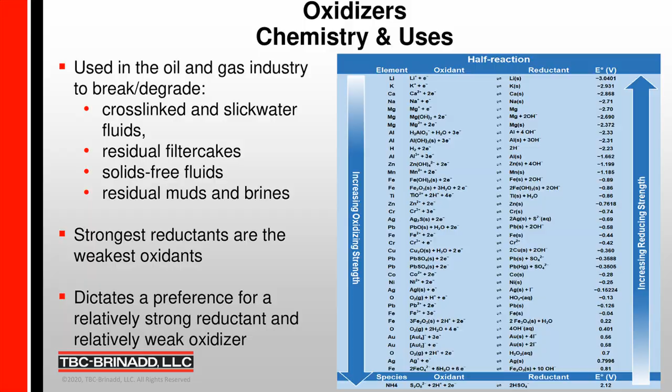So continuing with these species, the commercial forms of magnesium and calcium are attractive with respect to cost, and again, relatively strong reducers, with the potential to accelerate, thus control the reaction, as well as impart relatively safe handling and logistics.

But one important parameter is its relatively slow solubility of this class of peroxides. They remain stable for extended periods of time while in an alkaline environment.

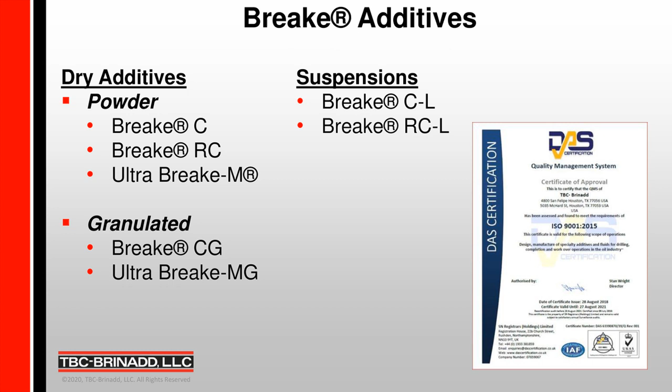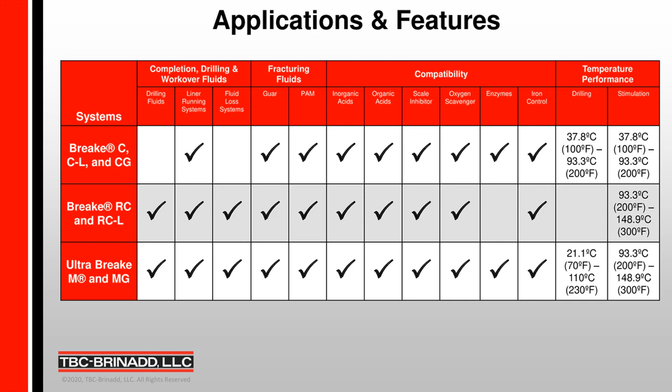So next, Kim will describe in more detail the performance that these products afford and expand upon their utilization for PAM viscosified fluids, as well as fluids that are viscosified with biopolymers, such as drilling and workover fluids, and their subsequent degradation versus time. So Kim?

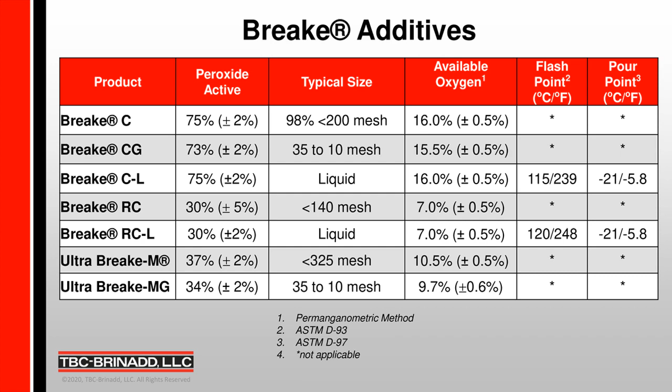Thank you, Mark. As Mark mentioned, today we will be presenting each polymer breaker's features and performance in various drilling and stimulation applications to showcase the diversity of TBC-Brinadd's Breake system additives.

We would like to start with our Breake C and CG products. This peroxide series has the highest peroxide content with active oxygen level as high as 16%.

The CG product is our granular product, developed to reduce concerns with dust hazard in the field. Both Breake products remain stable within storage and have active oxygen loss less than 1% per year. It will disperse readily in water and brines.

pHs, when introduced, will range from approximately 8 to nearly 13, dependent upon concentration. Typical temperature application ranges for the Breake C and CG is from 100 to 200 degrees F, and typical concentration ranges from 0.25 to 2 pounds per 1,000 gallons.

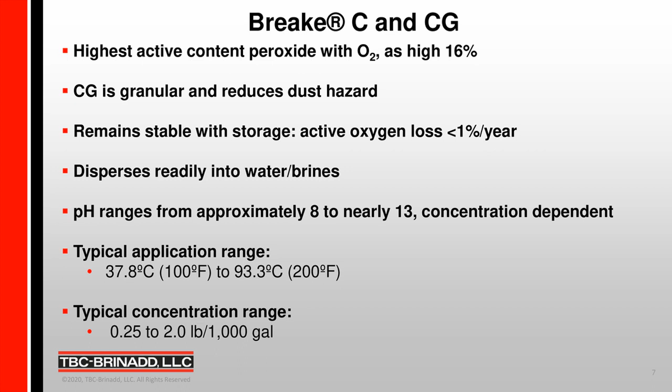Next, we will look at the performance of Breake C in Slickwater fluid testing. This testing was presented in our AADE publication that Mark mentioned.

This assessment utilized a Grace M5600 rheometer to capture viscosity under pressure and temperature, whereby an arbitrary timeline was utilized to simulate a pumping fracturing operation.

The laboratory method involved the preparation and mixing of a slickwater fluid, such as utilized in fracturing operations, at a dosage as applied in operations where a relatively elevated viscosity is required, for example, like the toe of the completion. Elevated viscosity was utilized in order to determine the degradation of the residual slickwater fluids, thus the necessity to utilize a higher polyacrylamide concentration.

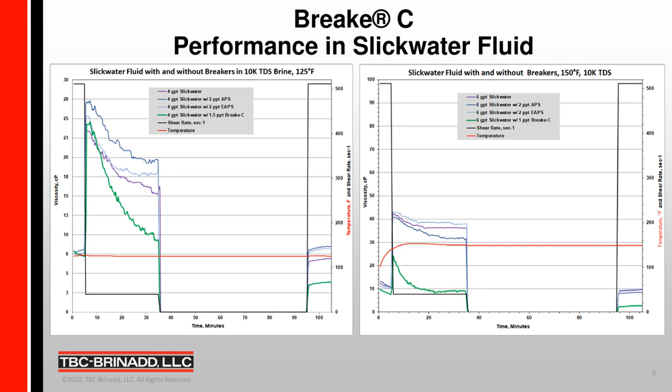Next, we will look at Breake C's performance in a cross-linked fluid.

The guar setup is a 25 pound per 1,000 gallon guar at a pH of 11.8, at 200 degrees Fahrenheit, and the Breake C concentration was 2 pounds per 1,000 gallons. Viscosity reduction occurs over time and is measured until viscosity is at or below our target point of 10 centipoise.

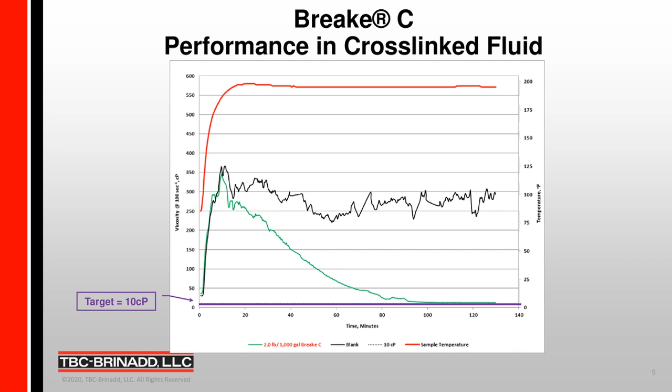Next, we will introduce you to our liquid suspension Breake C-L. Breake C-L is our calcium peroxide suspension and an environmentally friendly synthetic fluid.

The same typical temperature application applies here, from 200 down to 100 degrees Fahrenheit. Typical concentration ranges depend on the application. In drilling, it is 0.5 to 2 gallons per barrel. For stimulation, it's 1 to 5 gallons per 1,000 gallons.

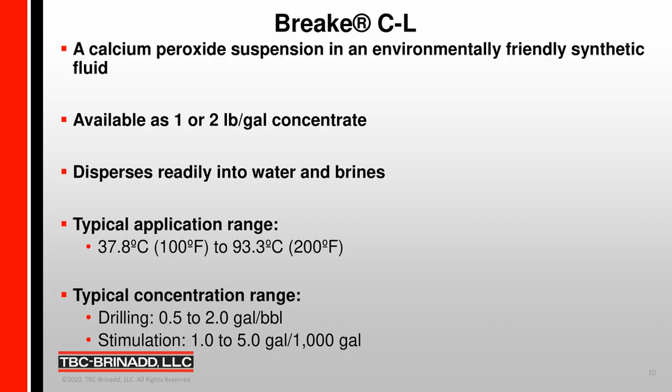Breake CL's performance in cross-linked fluid uses a 25 pound guar again at 200 degrees Fahrenheit. The Breake CL concentration is 2 gallons per 1,000 gallons. Like Breake C, Breake CL performance exhibits the same trend, with viscosity reduction over time measured until viscosity is at or below our target point of 10 centipoise.

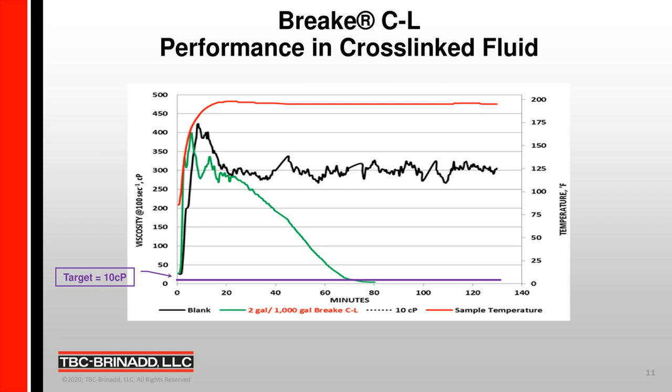Next, we will look at Breake CL's performance in a coiled tubing system. This information can also be found in our AADE conference paper that Mark mentioned earlier.

We had the opportunity, if a customer came to us, with a polymer-based solids-free system used for drilling laterals via coiled tubing, to be assessed with respect to the potential to remediate reported damage. Operations suspected excessive viscous leak off during drilling of the horizontal intervals as the cause of damage, as recent production did not achieve programmed rates.

Specifically, the concern was invasion of a solids-free coiled tubing system into the producing formation, either as whole fluid, filtrate, and/or filter cake, where the filter cake likely formed close to the toe. TBC-Brinadd was asked to evaluate incorporating a breaker into the coiled tubing system used during drilling that would remain inert and subsequently degrade the viscosity of any residual whole fluid, thus improving initial cleanup of the well and alleviating the perceived damage.

The required period to delay viscosity reduction for this solids-free system was established using previous horizontals, including a safety factor, and was determined to be 40 hours.

This graph shows rheology measurements versus time for both high-end 600 RPM readings and low-end readings at 6, 3, and 0.3 RPM, respectively, for two controls versus selected coiled tubing systems.

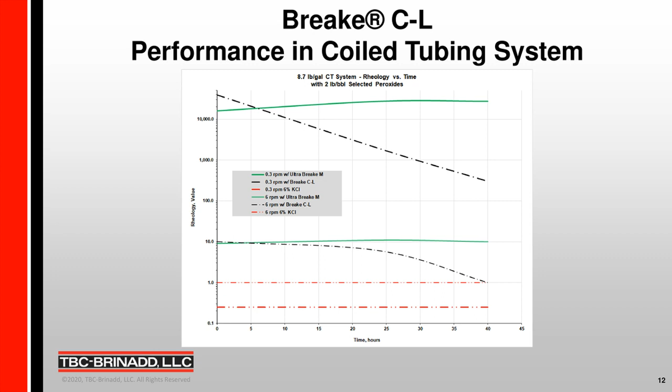Introducing our Breake RC, which is our reduced calcium peroxide. It is an alternative to Ultra Breake M, which generates approximately 5 to 7% active oxygen. Its reduced assay allows it to be classified as a non-oxidizer. It is also stable with storage and has an active oxygen loss of less than 1% per year.

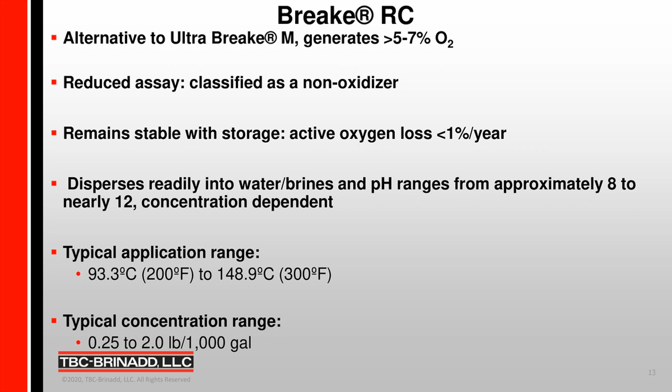It will also disperse readily into water and brines, and the pH ranges approximately 8 to nearly 12. Typical application ranges from 200 to 300 degrees F, and typical concentration ranges from 0.25 to 2 pounds per 1,000 gallons. Next, we will see Breake RC's performance in a cross-linked fluid.

The same guar setup of 25 pounds per 1,000 gallons was utilized. Temperature application for this was 250 degrees F. The Breake RC concentration was 3.5 pounds per 1,000 gallons. Breake RC's performance provides viscosity reduction over time, measured until viscosity is at or below our target point of 10 centipoise. An effective break was reached within 75 minutes.

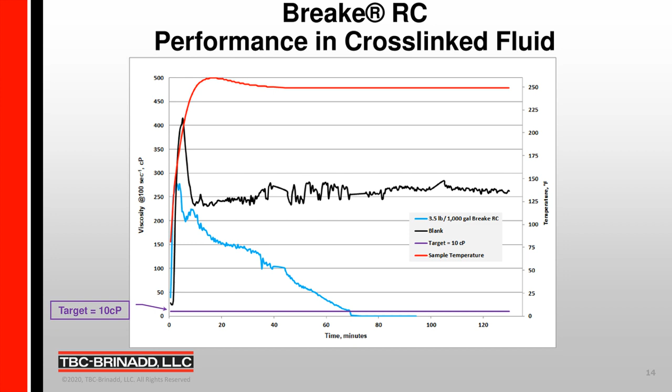Next is the liquid suspension Breake RCL. It is a suspension of calcium peroxide based in the same environmentally friendly synthetic fluid used for Breake CL. It is classified as a non-oxidizer, and it is available in 1 or 2 pounds per gallon concentrates.

Typical application range remains the same, 200 to 300 degrees F, and the typical usage concentration range is 1 to 5 gallons per 1,000 gallons. Now we will show you Breake RCL's performance in a cross-linked fluid.

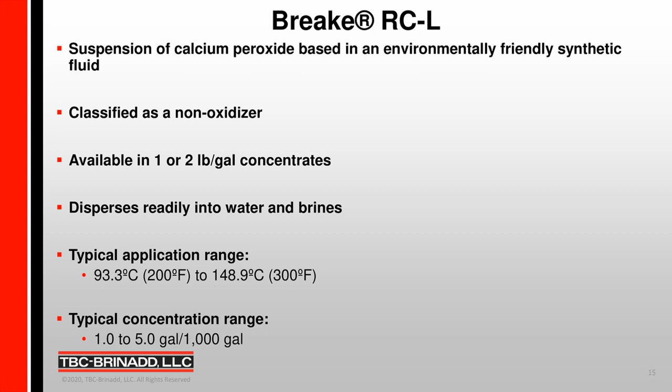Here we're testing it in another 25 pound per 1,000 gallon guar, 11.8 pH, 250 degrees F. The Breake RCL's concentration was 2 gallons per 1,000 gallons. We had a customer requirement for a break profile that would be achieved around 2 hours. We were able to provide stable viscosity over time, with the break performance occurring at the requested time period.

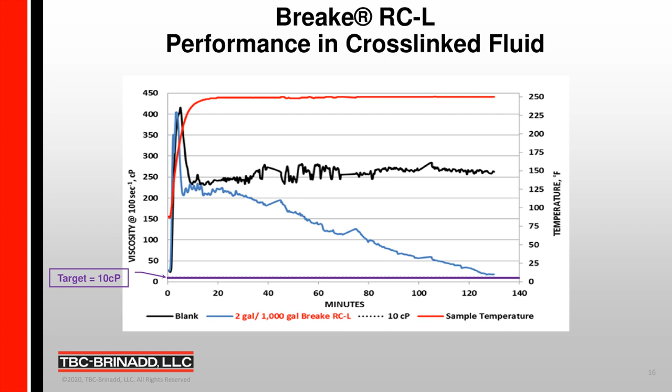Introducing our magnesium peroxide product line, Ultra Breake M and MG. They are available in two sizes. M is the powder and MG is the granular, again developed to reduce dust hazards seen in the field.

Alkaline magnesium peroxide is used as a delayed breaker for drilling and stimulation applications. It will improve or has been proven to improve filtrate removal in drilling and completion operations, especially at temperatures less than 109 degrees F. It's activated by temperature or a mild acidic solution.

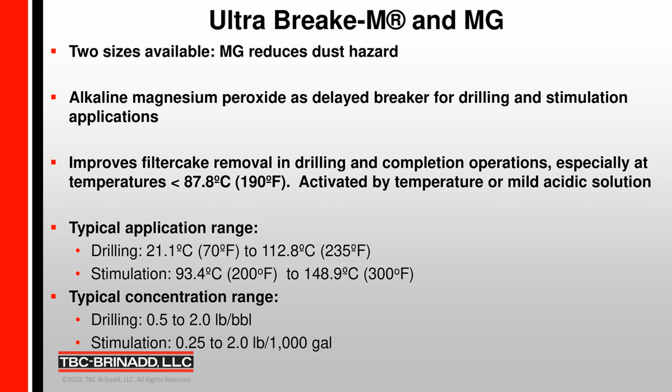Typical temperature ranges dependent upon drilling is from 70 degrees F to 235 degrees F. In stimulation, it ranges from 200 to 300 degrees F. Usage concentration in drilling is 0.5 to 2 pounds per barrel, and in stimulation is 0.25 to 2 pounds per 1,000 gallons.

Next, we have Ultra Breake's performance in a Slickwater fluid. This testing is from the same paper from the AADE mentioned earlier. The preparation of these Slickwater fluids were sheared at the same RPM of 1,000 RPMs for 30 seconds to produce the slick water. It was then placed in the rheometer cup and a 400 PSI was applied.

Four stages were again repeated: 5 minutes simulating pumping, 30 minutes simulating velocity in a fracture, 60 minutes for shut-in time, and then the final 10 minutes to give our final viscosity.

The slick water fluid with Ultra Breake maintained viscosity during stage 2 at the 40 reciprocal shear rate, while providing break performance with 80% viscosity reduction compared to the baseline, and only required 0.45 pounds per 1,000 gallons usage concentration, as opposed to the others that were at 2 pounds per 1,000 gallon concentration.

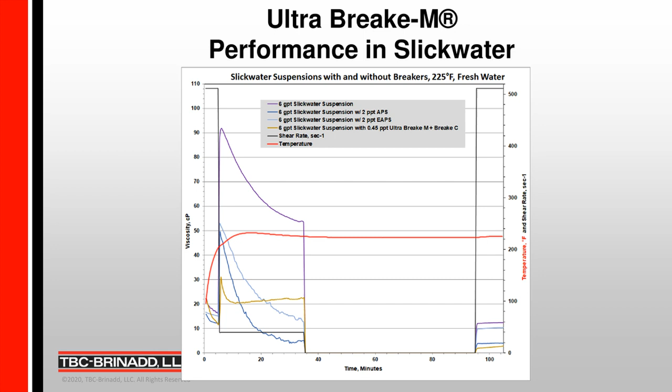Next, you will see Ultra Breake's performance in a Crosslinked fluid. Here, the testing temperature was 275 degrees F and a 25 pound per 1,000 gallon guar. Usage concentration for the Ultra Breake was 4 pounds per 1,000 gallons.

The Crosslinked fluid with Ultra Breake maintained stable viscosity over time at 275 F, with break performance occurring near the 2-hour mark.

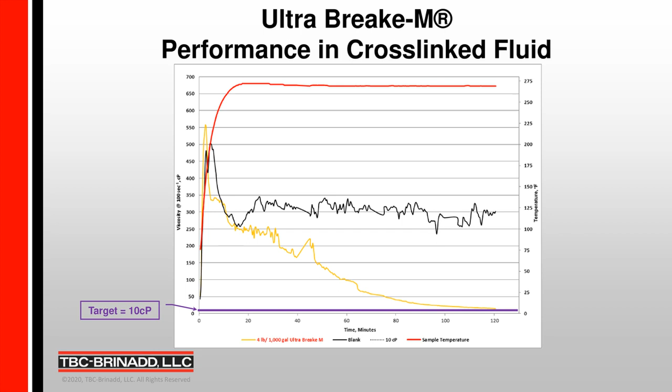Ultra Breake's performance now in a drilling fluid, and its impact on drilling fluid's viscosity, especially at the low shear rate viscosity point of 0.3 RPMs. When looking at drilling fluids, the 0.3 RPM allows us to have measurable tracking of the peroxide's impact on the viscosity of the fluid over time.